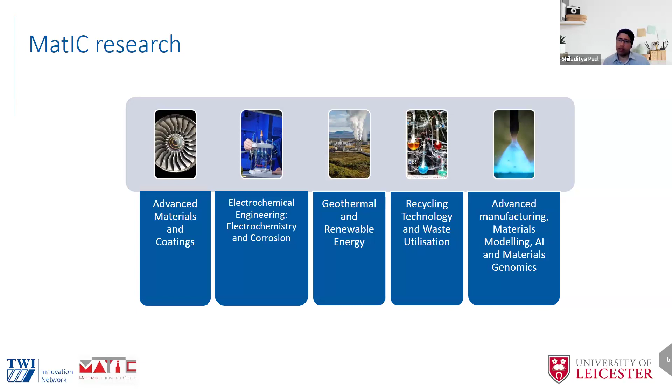And of course, as I mentioned, we do have an area looking at advanced manufacturing, materials modeling, and using AI-based methods to do what we call materials genomics.

Here's a snapshot of some of our projects, including completed ones like GeoHex, looking at geothermal heat exchangers. Solrec 2 is where we are looking at multi-material systems, and Sunrey is looking at novel perovskite photovoltaics.

Forge is developing novel complex materials - compositionally complex alloys that we are developing using machine learning and then characterizing the materials developed later on. Innovative drinking water disinfection, H2O for all, is developing technologies for safe drinking water.

And Sehrene, which started this year, is going to look at novel energy storage systems, a combination of thermal energy storage and electrical energy storage. There are several other projects that I haven't actually talked about.

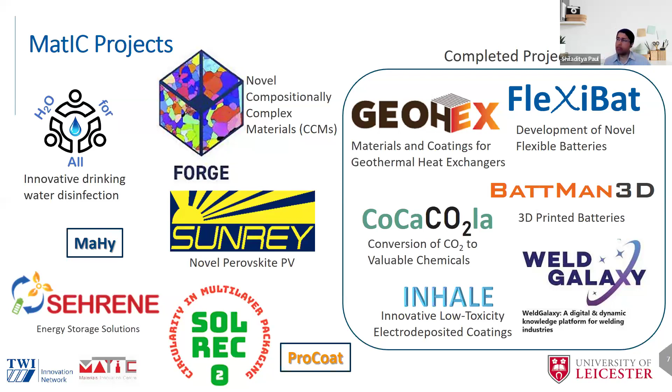So in the past 6 years or so, we have managed to get over £3.5 million worth of funding through UK government, Innovate UK, and European projects, and thanks to the Innovation Network for putting us in touch with several of the partners in Europe and also helping us develop some of these bids.

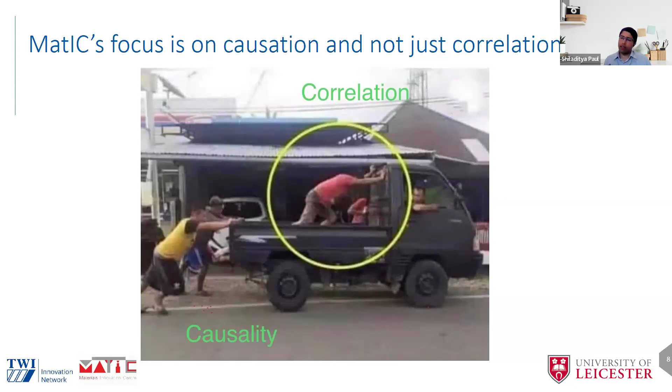So MatIC's focus is on causation rather than correlation. I like to present this slide where the person on that vehicle is just looking at what others are doing, not really understanding the reason for it, and just correlating rather than finding the causality. This is something MatIC wants to do - look at causality rather than be that guy at the top.

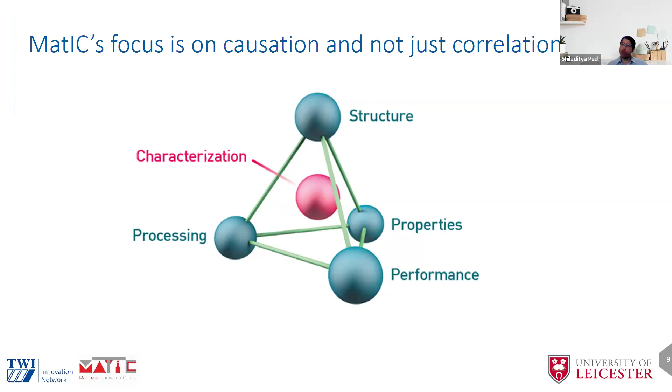So how do we do that? We try to understand the link between processing, its structure or microstructure, and try to correlate that with properties and performance. We do that through detailed characterization and try to understand the cause of certain behavior, performance-wise or property-wise, that stems from microstructure derived from the processing related to that particular material. This is what fundamentally MatIC is trying to do - understand how microstructure drives the properties and performance of materials, which is inevitably linked to the processing of those materials.

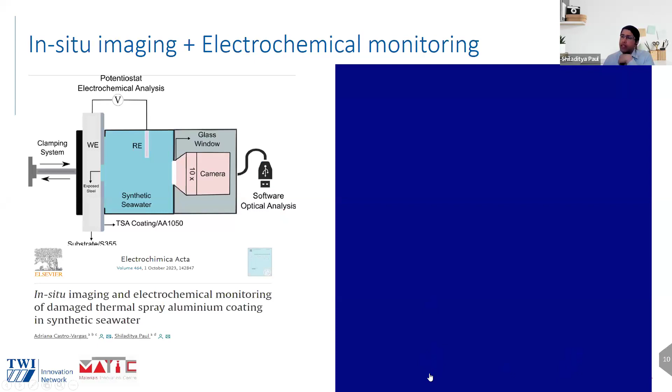I'm going to present just one slide showing something we have been trying to do to understand the fundamental principles that govern properties of materials. This work was carried out by Adriana, who will give a talk today. We were trying to understand how defects within thermally sprayed aluminium give rise to certain behavior, or how defects could or couldn't be protected when exposed in synthetic seawater in this case.

We used in situ imaging and electrochemical monitoring to understand the activity when you have a defect within the coating. In the middle you see there is a defect - that defect is the steel substrate, and the rest of that circular region, the ring, is actually thermally sprayed aluminium. As time progresses, the activity of that coating system goes down. You can see the bubbles have stopped emanating from the middle because the steel in this case is acting as a cathode, and in those areas you'll tend to form calcareous deposits.

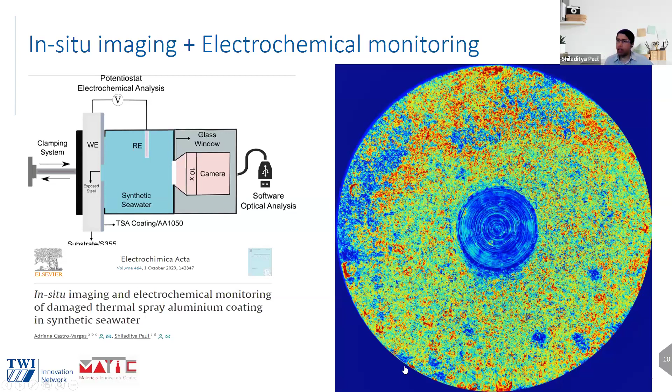In terms of the center itself, we have two academics - I'm the director of the center. We have 5 full-time equivalent staff; the actual number of staff is more than 5, but the full-time equivalent number is 5. We also have 3 current PhD students and 7+ research projects at the moment.

As I said, my name is Shiladitya Paul, and I'm the director. We also have a science director, Professor Hong Dong, who is very well known in the field of melt solidification processes, and he's leading the UK CDT on digitalization of the metal processing industry. We have 3 doctoral researchers - Nigar, Adriana, and Arunima - Adriana is going to give a talk today. Then we have several senior researchers, including Vikas, who has been with MatIC since 2019.

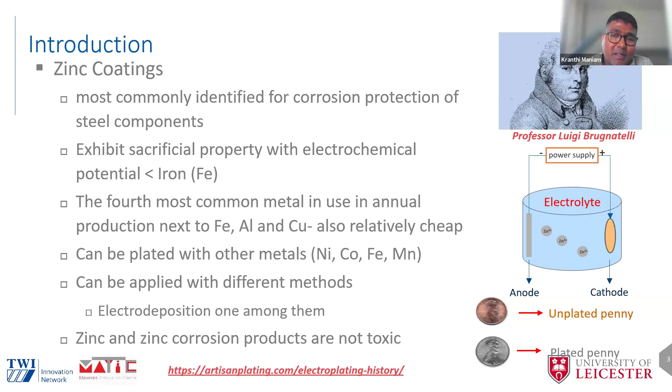Zinc is known for corrosion protection of metallic components, acting as a sacrificial layer. Zinc plating has been known for many years, starting with cyanide zinc, which involved hazardous chemicals and harsh environments. Since then, over almost 50 years, many developments happened, and today we've reached electrolytes free from ammonia and cyanide.

But you still have the problem of dealing with aqueous systems. The biggest problem is hydrogen evolution - in addition to plating, you also get hydrogen evolution, which decreases efficiency and disturbs the properties of the coating.

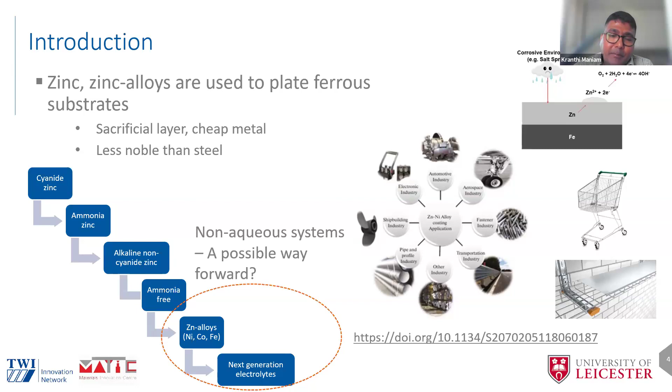Looking at recent developments, the next generation of electrolytes has targeted non-aqueous systems known as ionic liquids and deep eutectic solvents, formed either with a large cation and small anion, or a hydrogen bond acceptor and donor. Mixing these two components forms a mixture that doesn't release hydrogen. But the main problem is they are all halide-based - chloride, fluoride, bromide, or iodine - which can release harmful chlorine and bromine gas.

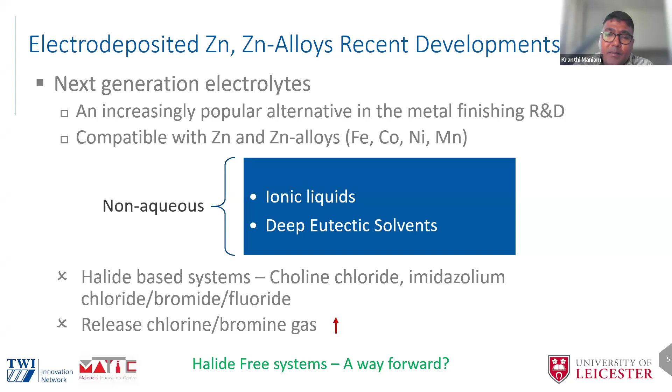So as a way forward, looking at halide-free non-aqueous systems - without chloride, bromide, or fluoride - is something that can be considered. That forms my objective.

That was the objective of my project, INHALE, which focused on low toxic electrolytes free from halides that can still perform better than current conventional or newly developed ionic liquids and deep eutectic solvents. Today I'll give an overview of coatings developed using these innovative low toxic electrolytes, and discuss corrosion performance, scale-up, and cost economics.

To understand this, I have taken a conventional halide-free alkaline aqueous system, which is cyanide-free, as well as an organic solution containing glycol plus acetate, and a popularly known deep eutectic solvent, choline chloride plus ethylene glycol, formed by mixing choline chloride and ethylene glycol in different ratios.

The industrially used plating cell is the hull cell, which is 267 ml. Since we are dealing with organic solutions which are expensive, we thought to go with a miniature cell known as the Tenori hull cell, which mimics the industrial plating cell. That is used to optimize the current densities and make a comparison amongst the three electrolytes. That was the first innovative thought we had, and we applied a cell current of 0.1 amperes and computed the current densities along the way.

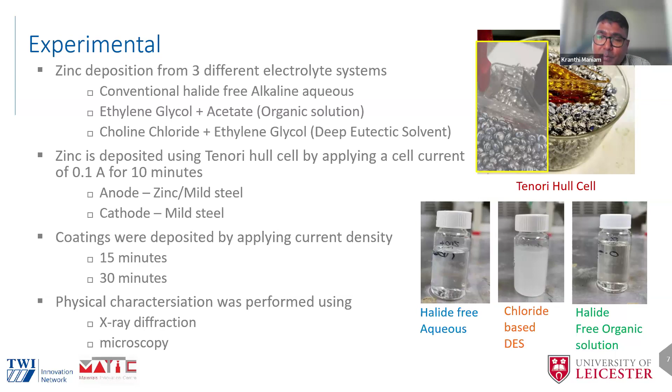You can see on the right, there are three different solutions. One is the halide-free aqueous, which is transparent and aqueous based. The chloride-based deep eutectic solvent is a bit turbid, whereas the organic solution is clear.

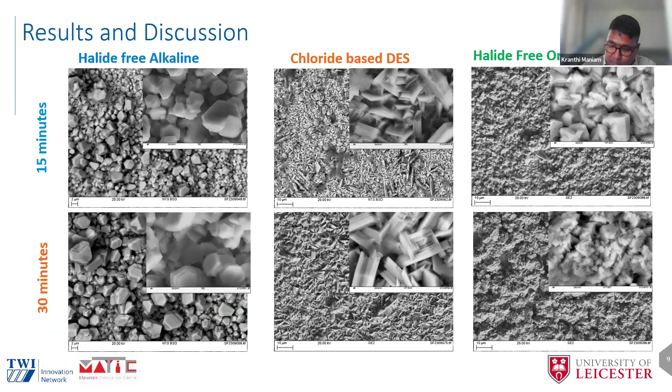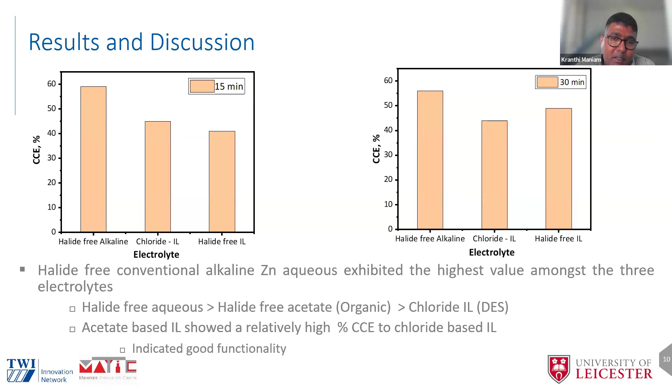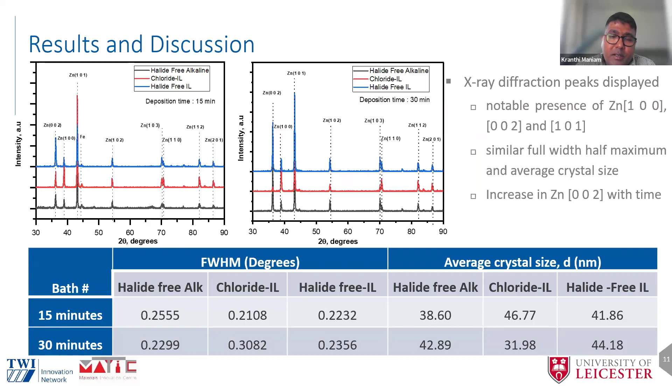If you look at this X-ray diffraction comparing the three different electrolyte systems, you can see that comparable planes were achieved, and the organic solutions mimic almost the halide-free alkaline solutions. That is what you get.

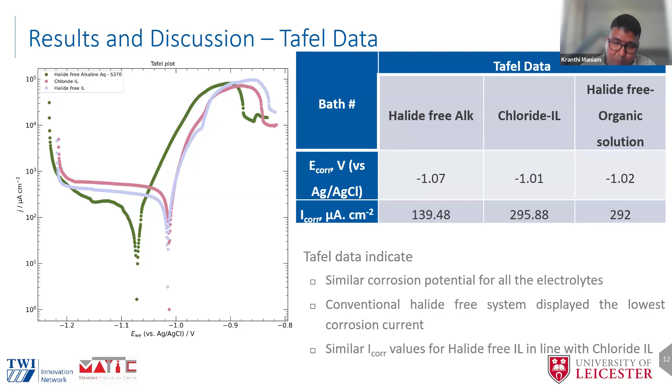With this motivation, I tried to develop different organic solutions. I thought organic solutions would really perform better, which was the motivation for performing the initial study using the standard benchmarks, the alkaline aqueous as well as the chloride-based deep eutectics. So I could figure out that a halide-free organic solution can perform better.

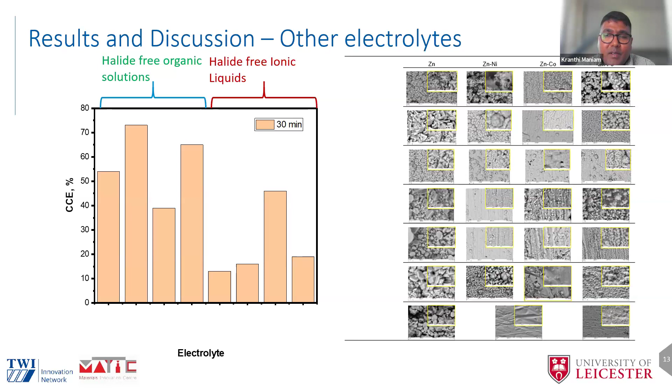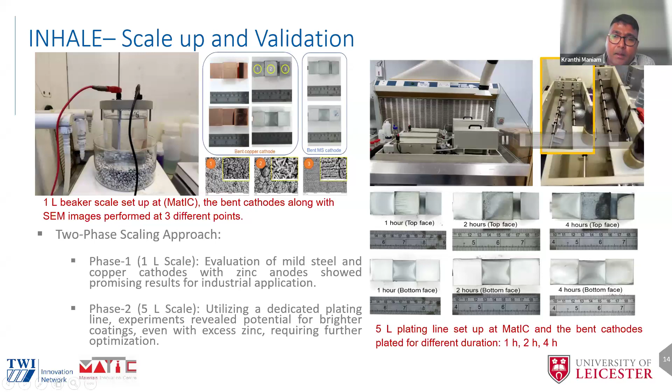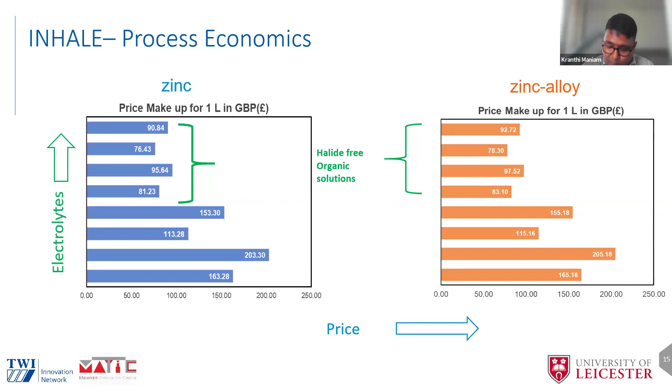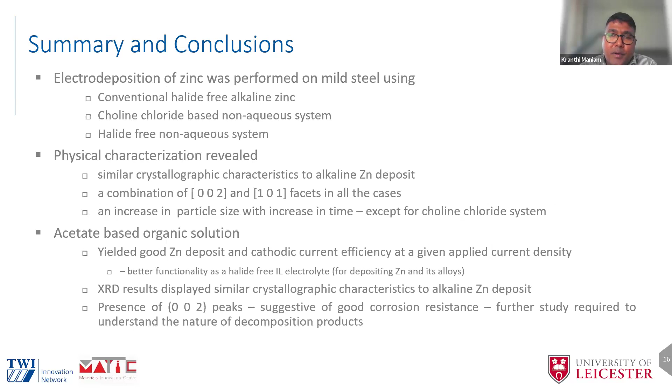Most importantly, we could get the 002 peaks, which suggests good corrosion resistance. We could also do the electroplating scaling. The study highlighted the necessity of scaling up, which was part of the project, and I did it in 2 phases: one is the 1 liter scale, and once successful with that, I could expand it to 5 liter scale. This showed the potential route towards commercialization, demonstrating that it has the capability to achieve commercial scales.

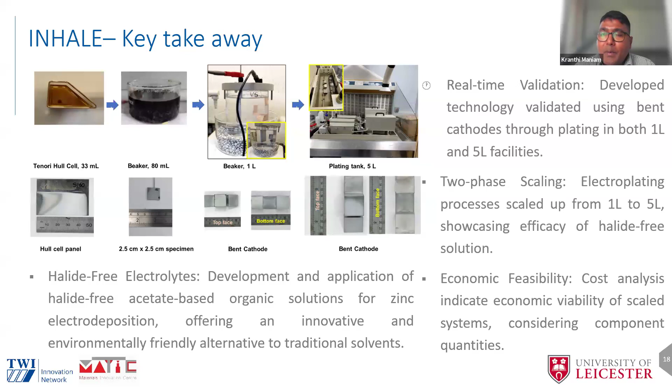So these are the snapshots of what I could also get. I could also perform an economic feasibility study, an initial basic economical feasibility study to understand the price variations, its impact, and whether we do 1 liter or 5 liter, is this price viable and feasible. Yes, from this study we could safely tell that it is a viable process, and it can run for longer durations compared with the conventional systems. That is the key takeaway from this study.

And I would like to thank my team. Prior to that, I would like to thank the director of MatIC for giving me this opportunity, because I never thought about being a Marie Curie fellow, it was only a dream for me. But Shiladitya was the person behind this to identify the potential in me, and I would like to thank him. Thank you, Shiladitya, and my team here who were always supporting me in many ways, I thank all my team members. And last but not least, I would like to thank the European Commission for believing in me and my potential, and for understanding my proposal and funding it. I really thank them for understanding the innovative aspects and awarding this fellowship to me. With this, I would like to conclude my talk. Thank you very much.

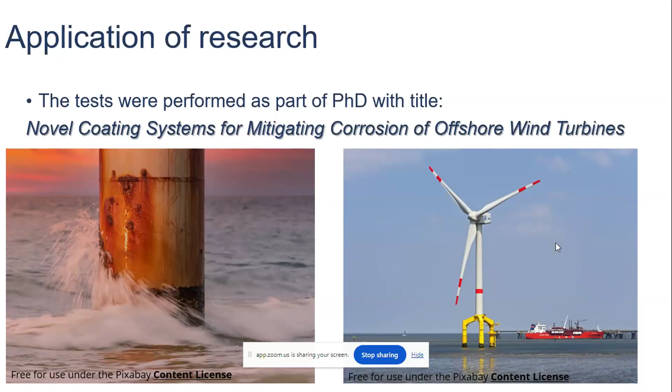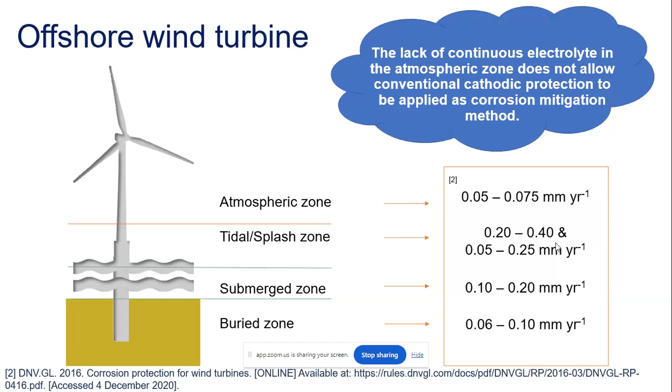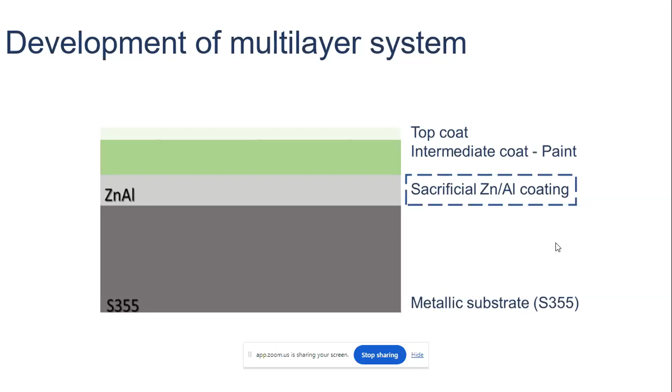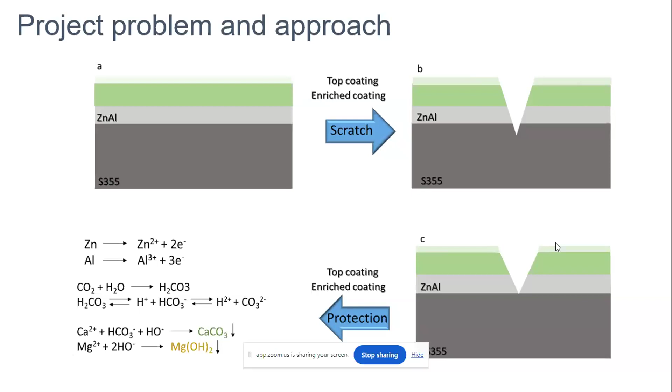Here in this slide is the project problem and how we approached its solution. On image A, you can see the system I previously described, and on images B and C you can see some artificially inserted scratches. On B, the scratch has propagated till the metallic substrate. On C, it's on the zinc aluminum coating, so zinc aluminum acts sacrificially. On the left-hand side, you can see the calcareous deposit formation that can protect the substrate in this case.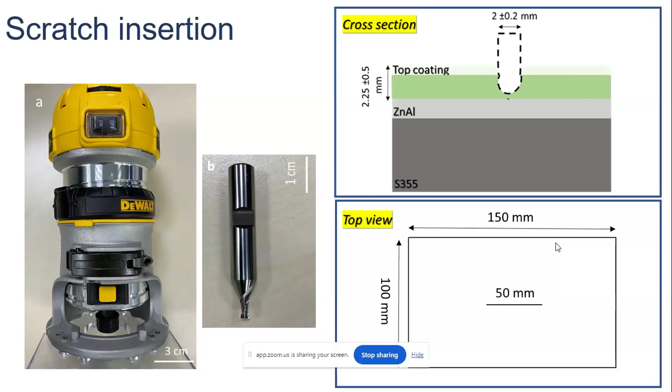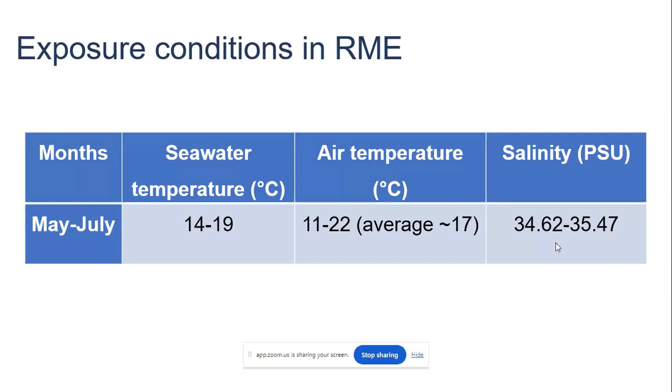The exposure conditions in the real marine environment: the exposure took place for 3 months, from May till end of July. The seawater temperature was around 14 to 19 degrees Celsius, the air temperature averaged 17 degrees Celsius, and the salinity was around 35 PSU.

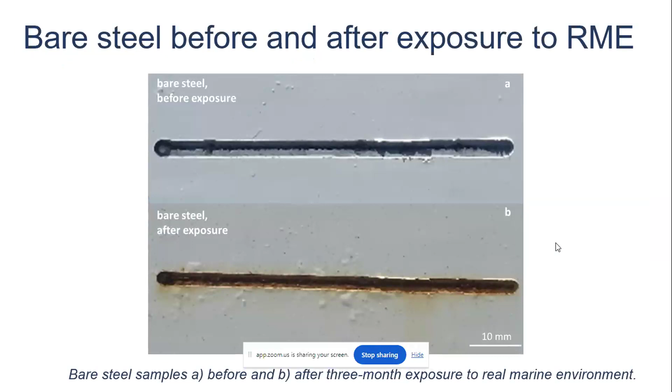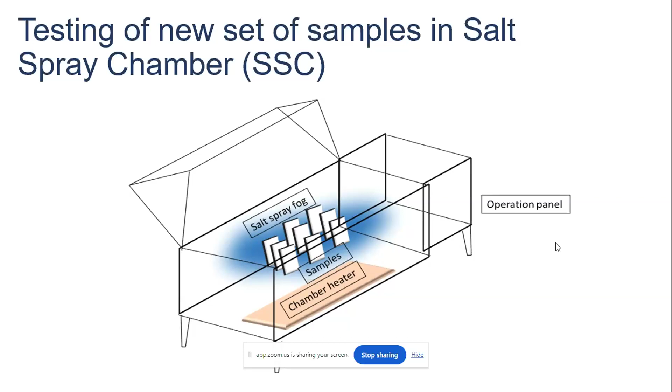The next set of experiments took place in a salt spray chamber at TWI, and here there is an image of the operation panel and a schematic representation of the whole salt spray chamber. You can see there is a chamber heater, the samples, and a salt spray fog that can be constant or not depending on the conditions selected.

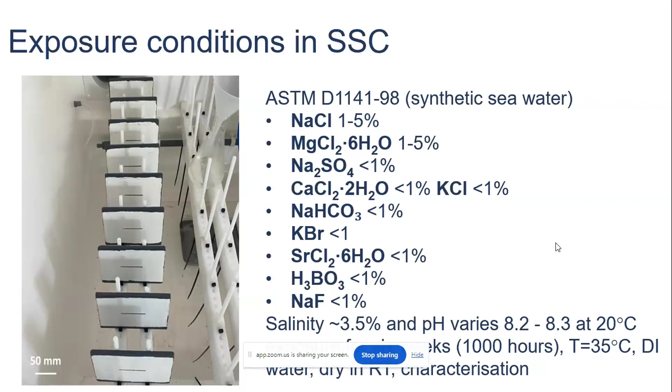After the exposure, the samples were removed from the interior of the salt spray chamber, washed with DI water, dried at room temperature, and then their characterization followed.

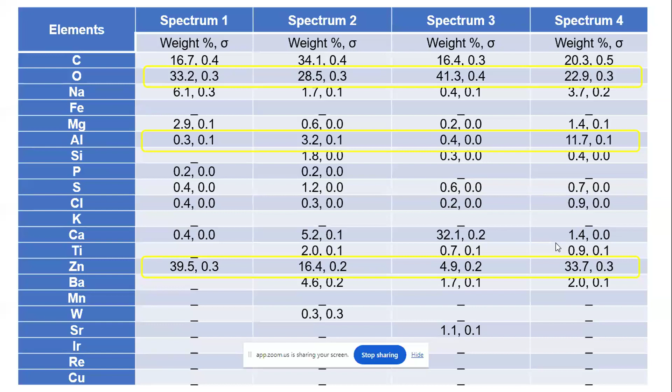As you can see, there are different formations on top of this image, and the EDX analysis showed these elements on top of the scratch. Again, for spectrum 3, it was quite noteworthy: the depletion of aluminium and zinc, and also the formation of oxides.

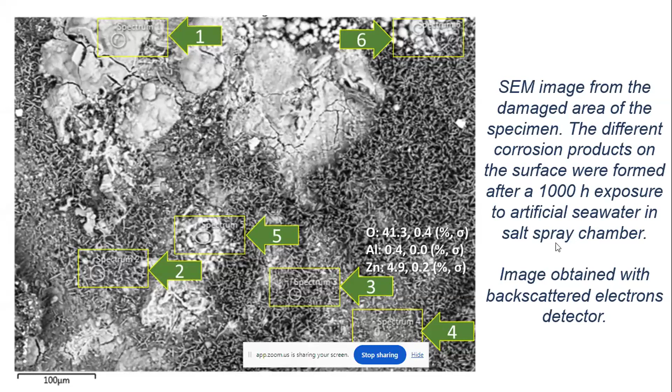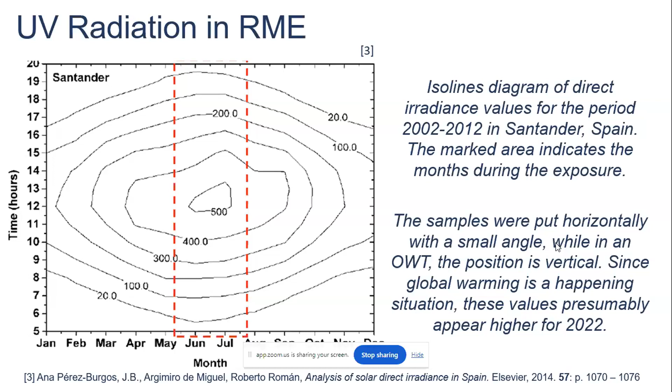In order to have a safer conclusion of why these differences happened between the real marine environment and the salt spray chamber, we found some previously reported data showing that from May till July, when the exposure took place, the sun conditions are quite extreme.

To conclude, it was not only the extreme UV exposure, it was also the rainfalls in the test field area which affected the presence of forming products. Although the exposure was longer for the real marine environment, the continuous corrosive environment in the salt spray chamber played a crucial role in the formation of these products, because the conditions were more aggressive.

So in order to have a safe conclusion about the performance of this duplex system, it is very important to have a combination and a comparative study of field and laboratory tests.

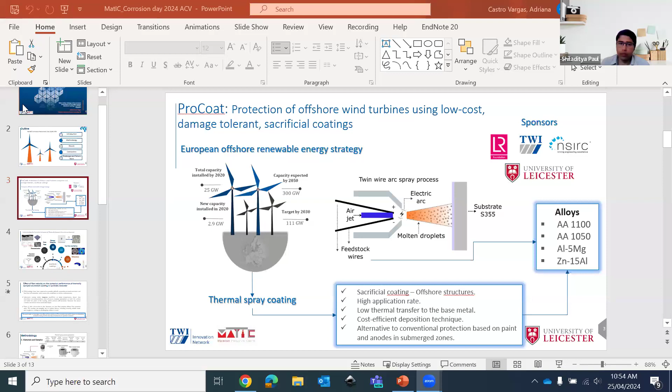Okay, thank you so much for this introduction. I hope you can see my screen. So for today, I prepared this presentation. First, I'm going to give a small introduction about the background and experience in MatIC dealing with these coatings for offshore environments. Then I will give you the methodology to evaluate them in offshore environments. Finally, I'm going to give some results, some conclusions, and one of the challenges for evaluating these coatings.

So in MatIC, we have developed several projects. One of them is related to the protection of offshore wind turbines using low-cost, damage tolerant, and sacrificial coatings, as a response to the ambitions, goals, and targets established by the European Offshore Renewable Energy Strategy. In that sense, we are talking about thermal spray coatings, and they offer several advantages: sacrificial protection for offshore structures, high application rate, low thermal transfer to the base metal, and it's a cost-efficient deposition technique.

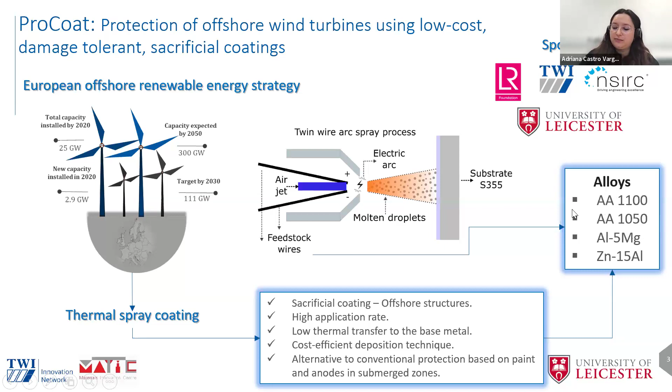Understanding the corrosion behavior of these coatings involves several techniques. In MatIC, we have developed several techniques, and they complement each other to understand how they behave not just in laboratory but also in field tests, as Adamantini mentioned before. So we have several electrochemical methods in order to understand the corrosion performance of these coatings. Here you can see on top the picture of the nature of the coatings - they have high porosity, also high roughness. The aluminum is quite active in seawater, but as it offers cathodic protection, we can get formation of calcareous deposits.

So also the characterization of those products is quite important to understand the mechanisms. Field tests are also quite interesting to see the damage tolerance of these coatings. Here we can see a coupon with an intentional defect after some time of exposure. At the end, we can see the formation of this white material, which could be aluminum corrosion products or even calcareous deposits, when the electrolyte reaches the substrate. Also, it's clear that the defect on the exposed steel is covered by calcareous deposits without any signs of corrosion loss. So in that sense, we have reported really low corrosion rates under stagnant conditions.

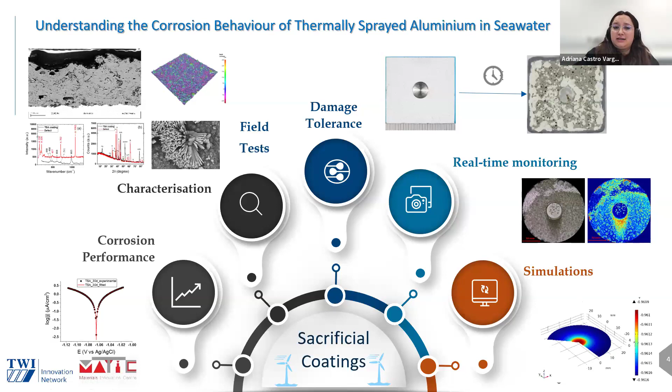Another important approach we follow in MatIC is real-time monitoring of this coating, as Shiladitya explained before, in order to see in real time what is happening and how we can correlate the surface activity with the electrical signal using different techniques. Finally, we have some progress in numerical simulation in order to establish the long-term performance of these coatings. As you can see, it's complex - the coating involves many things, but today I'm going to focus on the effect of flowing conditions on the performance of thermally sprayed aluminum coatings in synthetic seawater.

So first of all, what we note basically is that these coatings have been reported to provide cathodic protection to the steel and have low self-corrosion. Laboratory tests and also field tests demonstrate that they perform very well. After some time of exposure, we found aluminum corrosion products and calcareous deposits, and they precipitate on the surface but also inside the pores of the coating, which is beneficial because it reduces the self-corrosion of the coating.

However, in real life, ocean currents can remove these protective layers. Unfortunately, it's not clear how they affect this removal of these protective layers. There is little information in the literature on how the flow affects it.

These coatings are complex because of the porosity, anodic trend and roughness, and it's a bit challenging to study and give a quantitative value of the rate of degradation. For instance, some studies report the corrosion rate based on mass loss for this coating. However, it might not be practical because the pores are filled with corrosion products. In addition, the chemical procedure to clean the surface can result in excessive removal of the metal. So for that reason there is a high corrosion rate reported in these studies, but the procedure may not be appropriate.

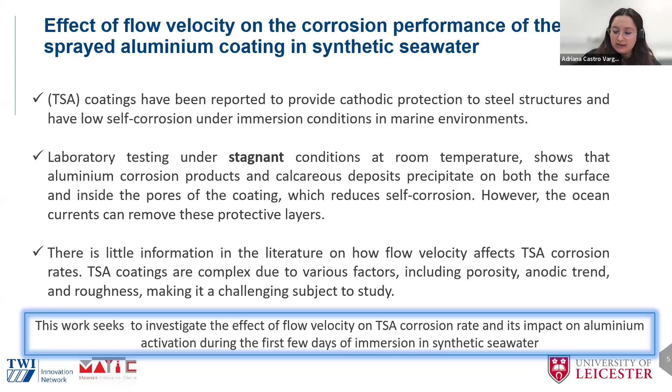For that, we follow this methodology. Here we can condense basically the procedure. We machine cylindrical inserts from a S355 rod, and we obtain the coating using the parameters shown in this table. This is a cylindrical insert with 12 millimeters outer diameter, so the surface under study will be 3 centimeters squared. And actually you can see the coating here.

There will be coupons with a thickness of around 300 micrometers, high roughness around 43 micrometers. On the bottom, we can see the elemental composition of the substrate material and also the coating. In this case, we are going to evaluate this coating for the immersed zone, and we have 99% aluminum.

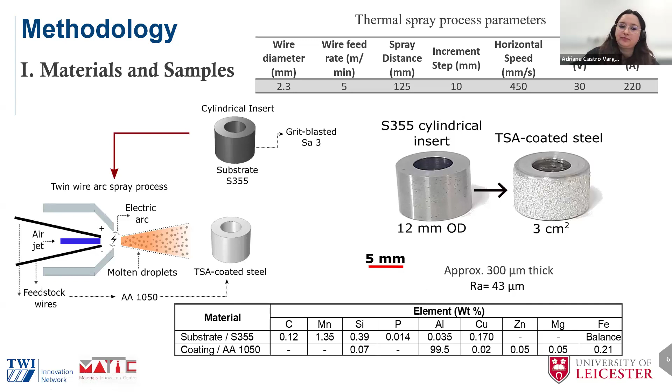So basically, to evaluate this coating, we use a rotating cylinder electrode, using a 3-cell electrode setup. Here we have the working electrode, which are our coupons described before, using silver chloride as a reference electrode and 900 milliliters of synthetic seawater. This is a commercial rotating cylinder electrode. The electric unit allowed us to set the velocity at 50 and 600 RPM. If we convert this velocity to linear velocity, we are dealing with 3 centimeters per second and 38 centimeters per second, at room temperature.

So after 10 days of exposure to these coatings, we collect information and analyze it. Basically, we monitor the open circuit potential and the linear polarization resistance. The scans were obtained at 10 millivolts per minute, polarizing at plus minus 10 millivolts regarding the corrosion potential, every 6 hours for 10 days. The corrosion rate was calculated following this equation, using the current density obtained from LPR.

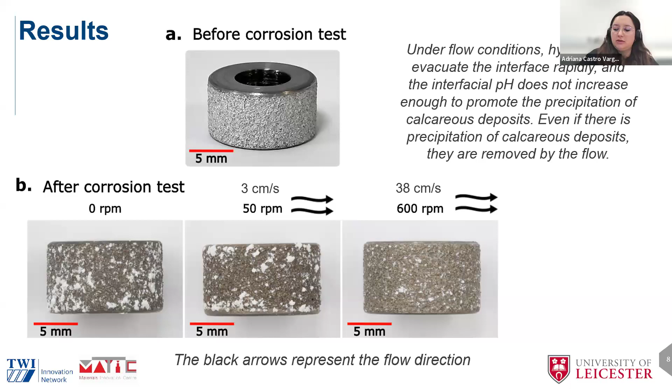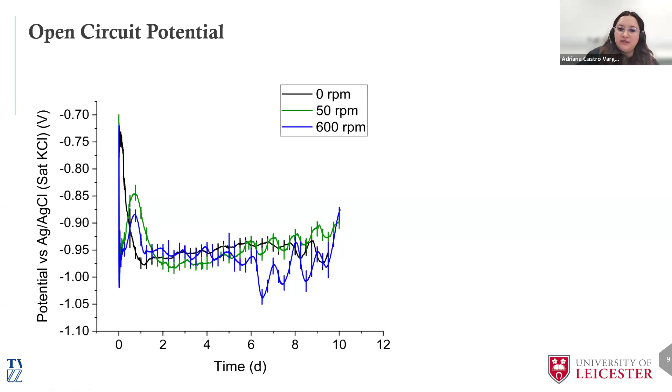In stagnant conditions, we observe similar things to what we reported before: low deactivation and a kind of stabilization of the potential. However, at 50 and 600 RPM, we can see fluctuation of the potential, which is unusual for stagnant conditions. We can attribute this fluctuation to the formation and elimination of these corrosion products or protective layers by the flow. Actually, in the bottom of the tank we observe these compounds at 50 and 600 RPM, which means they dislodge from the surface during the experiment.

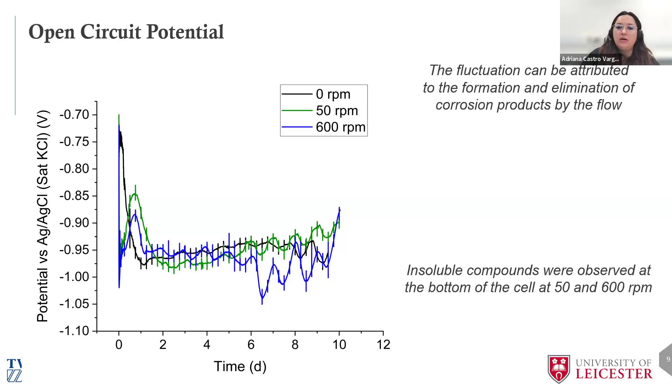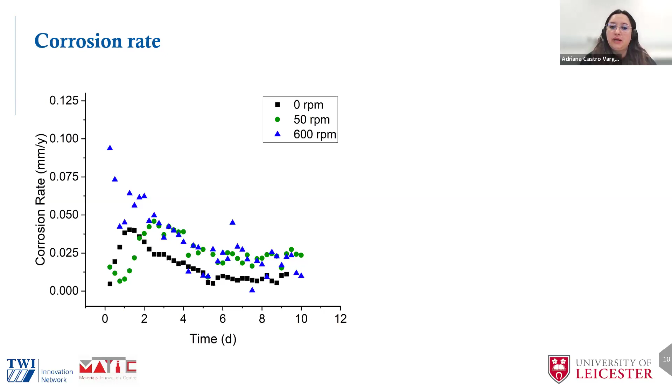So the protection mechanisms offered by TSA in seawater involve forming corrosion products, passivation tendency of aluminum, and precipitation of calcareous deposit. The main advantage of these coatings in marine environments is due to the synergy of all these things happening at the same time. However, if these protective layers are removed, the aluminum is reactivated and the corrosion process might accelerate.

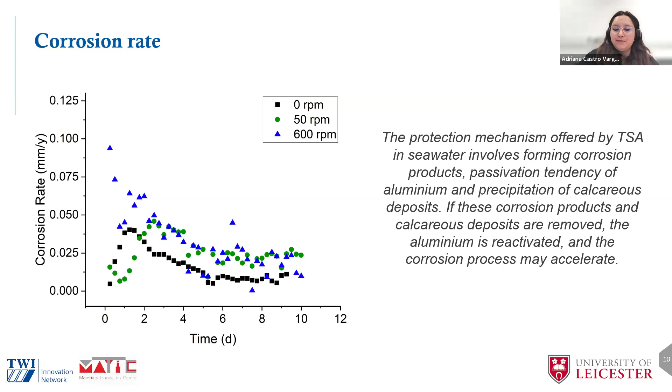As conclusions, it's clear that hydrodynamic conditions strongly influence the corrosion rate of the TSA and also the precipitation of calcareous products and corrosion products, at least during the 10 days of immersion. Nevertheless, the ability of TSA to provide cathodic protection to steel is quite evident.

We report in these experiments low corrosion rates under stagnant conditions, around 0.012 millimeters per year. But of course, they are higher with 50 and 600 RPM. However, whether the corrosion rate will decrease over time, if these layers are more stable over time, is not clear with these short experiments. And of course, more research is required.

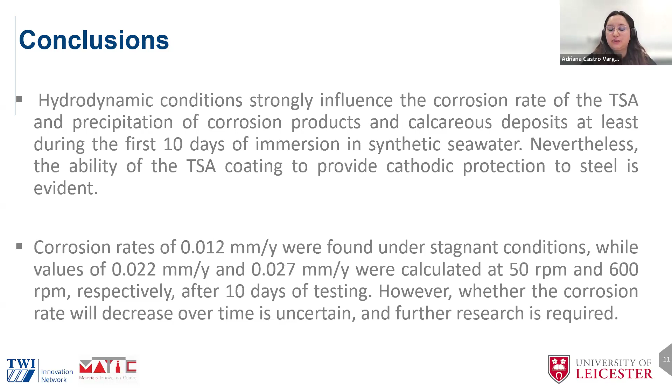So basically as challenge and future work, it's important to identify also the corrosion products and deep examination of the cross-section before and after exposure, in order to consolidate in a better way the corrosion mechanism, because we have mass transfer in the system. But it gives us a good idea about the corrosion rate, especially in the first days of immersion.

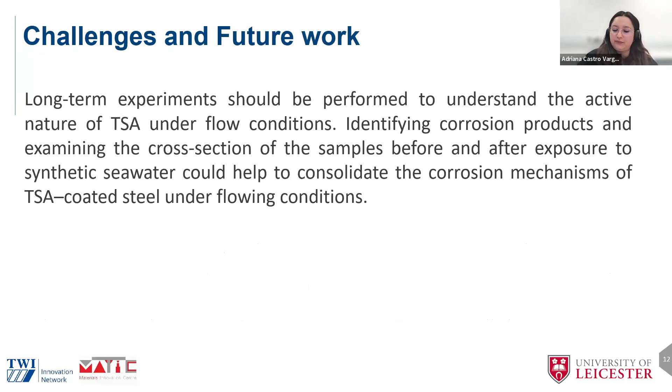And finally, I would like to thank you for your attention, and please don't hesitate to contact me if you have questions regarding this topic.

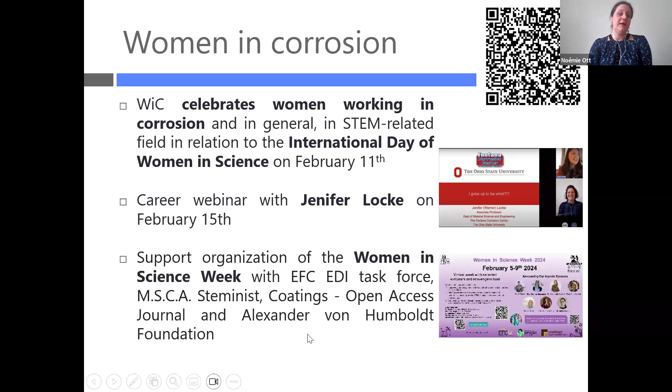And of course, we are all here today for Corrosion Awareness Day, where we promote activities throughout the world. We had a topical event yesterday about corrosion engineering versus corrosion management. If you missed it, you can listen to it on YouTube. It hasn't been posted yet, but I will do it tonight, so from tomorrow on it's available.

We were also part of the WCO, AMPP, and EFC social media campaign. Just look at it on LinkedIn if you're there. It's amazing what people posted throughout the world about corrosion and corrosion awareness. If you want to see wonderful pictures of what is happening around you, I highly recommend you have a look at this.

One main event, basically the only event where we all see each other during the year, is at Eurocorr. If you go there, come to our annual meeting. It will be on Monday evening, and this year the get-together event is actually combined with a career fair.

So we try to mix people seeking a new career opportunity with industry and academia that are looking for new talent, a unique opportunity for you to informally meet maybe a future employer. We have a Young EFC plenary lecture which will be given on Tuesday morning. Every year we run a 3-minute plenary lecture competition, and the winner this year was Emilio Martínez-Pañeda.